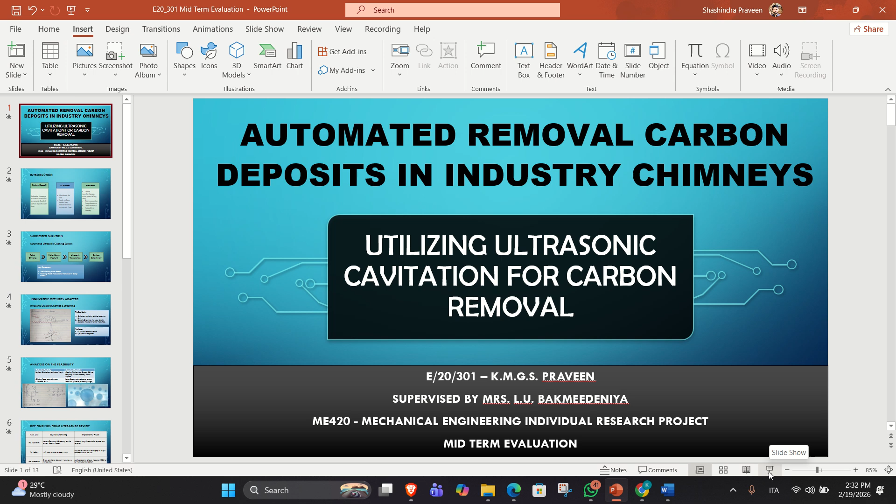I am Shashindra Praveen, and today I will be presenting the midterm evaluation for my ME420 individual research project. My research focuses on utilizing ultrasonic cavitation for carbon removal, especially designing a system to clean industrial chimneys. This project is advised by Mrs. L.U. Bakmeedeniya.

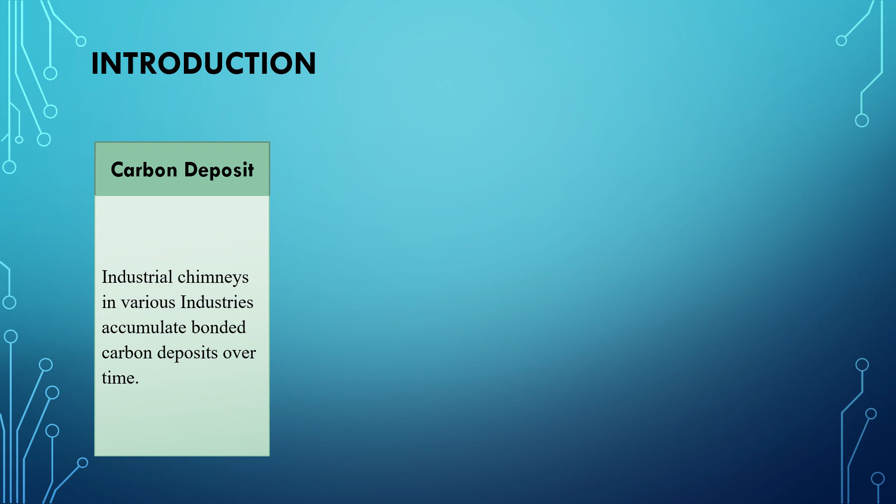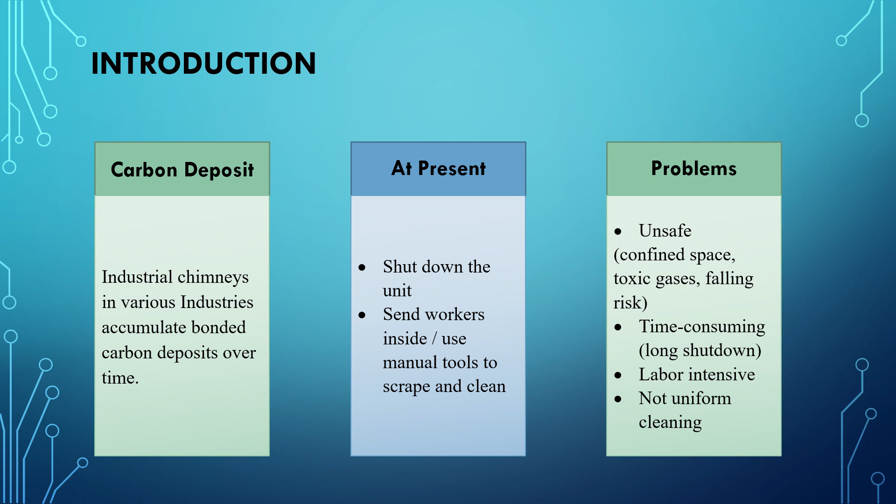Currently in industrial chimneys, the wall is bonded with carbon deposit over time. To clean them, operators have to completely shut down the unit and send workers inside with manual tools. As you can imagine, this creates many problems: it's fully unsafe due to confined space, toxic gases, and falling risk. Also, it involves a long time-consuming shutdown and is heavily labor intensive. And this is not a uniform cleaning because it is manual.

To solve this, I am proposing an automated ultrasonic cleaning system as shown in this slide. The concept relies on a wall-climbing robot chassis equipped with a special cleaning head containing a piezoelectric transducer and a water spray nozzle. The system applies a water medium, and the ultrasonic transduction removes the deposited carbon while the robot climbs.

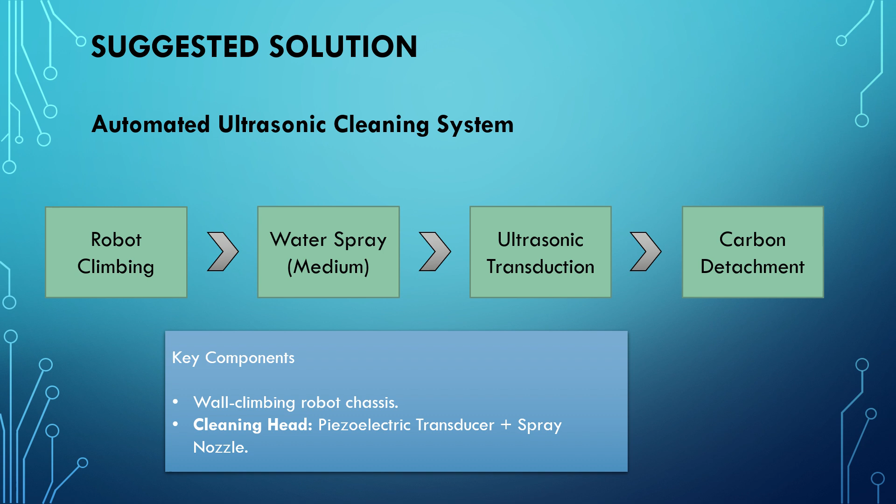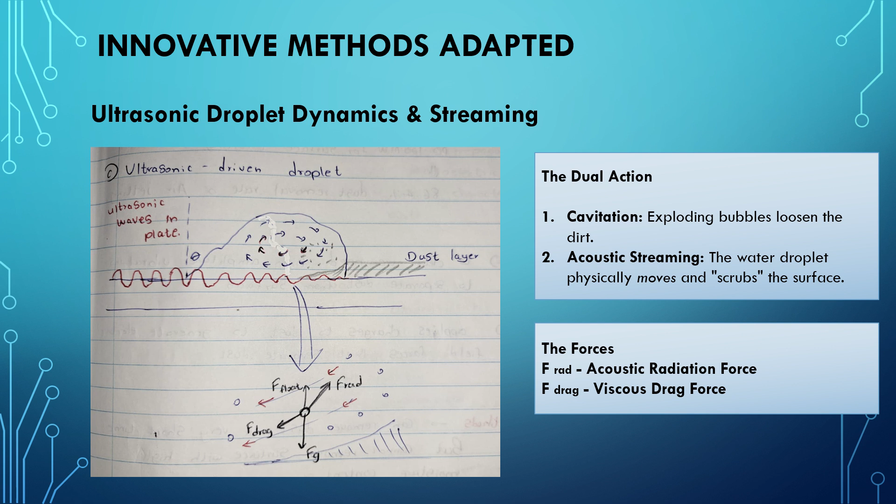So how does the actual cleaning work? As you can see in my sketch, the mechanism relies on ultrasonic-driven droplet dynamics. We are balancing acoustic radiation force and viscous drag force. This creates a dual action. First, cavitation occurs, where microscopic exploding bubbles physically loosen the dirt. Second, we get acoustic streaming, where the water droplet is physically moved to scrub the surface and clear away the loosened carbon.

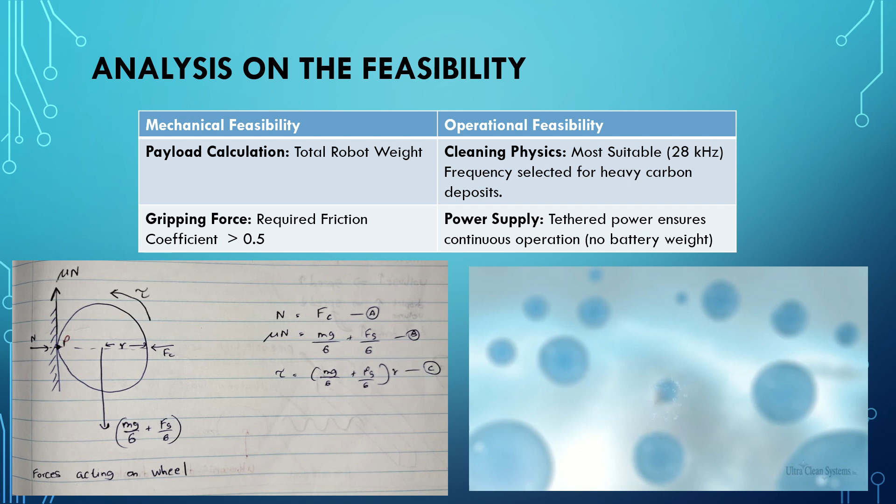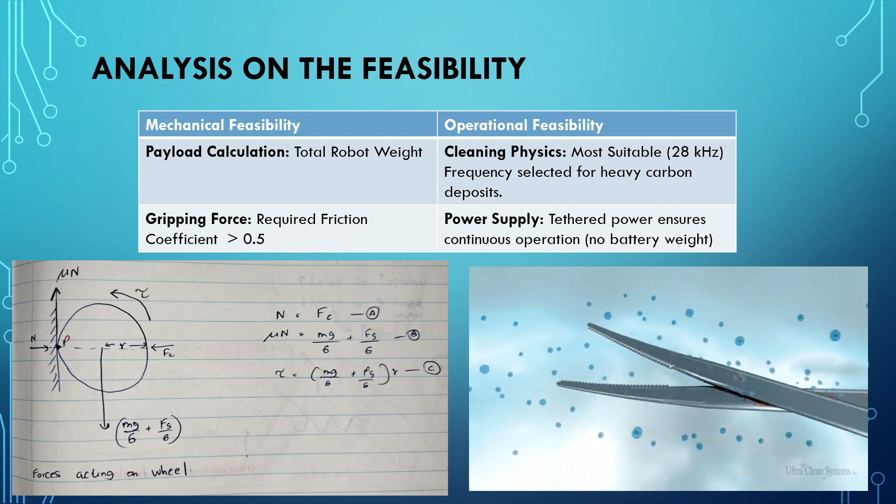Before building, I conducted a feasibility analysis: mechanical, looking at the free body diagram of the wheel forces. The gripping mechanism requires a friction coefficient greater than 0.5 to support the payload. Operationally, I need to keep the robot weight down. The system wants power for continuous operation, so I use a continuous power supply for this.

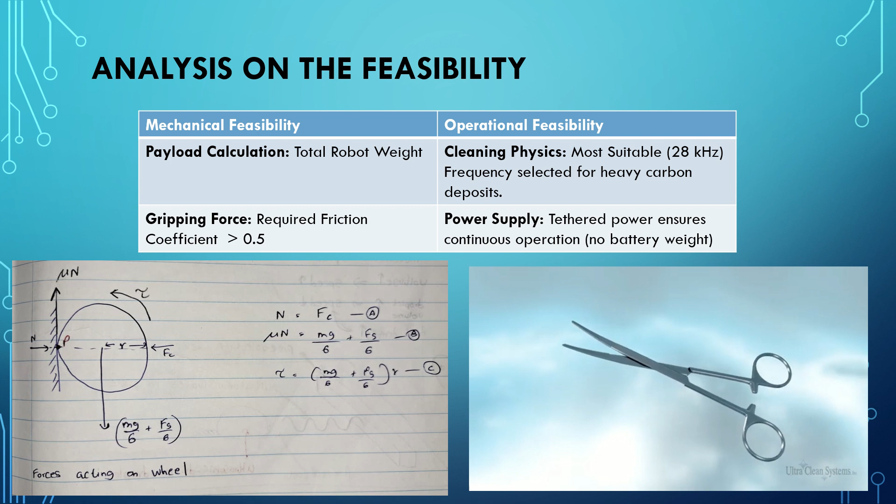For this cleaning physics, I select the 28 kHz frequency, which is more suitable for tackling heavy carbon deposit, but I have to analyze more about the frequency to find the optimal one for removing the carbon particles.

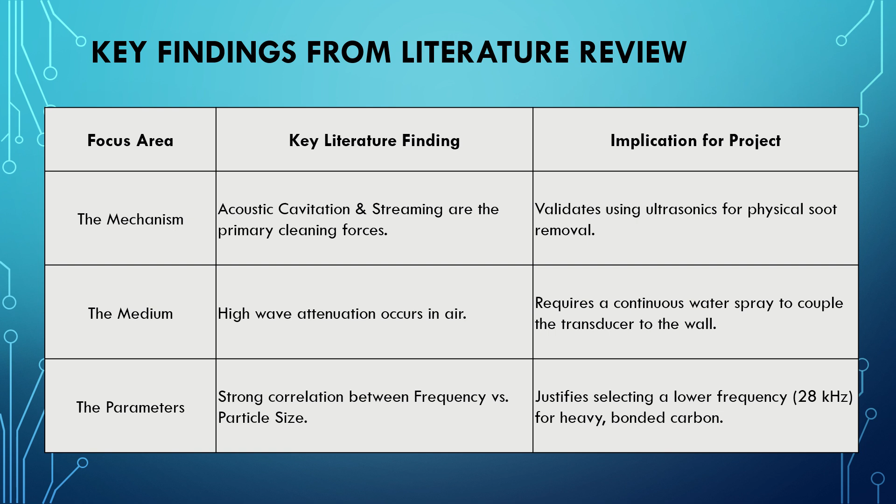During my literature review, I confirmed that acoustic cavitation and streaming act as the primary cleaning forces. However, because ultrasonic waves experience high attenuation in air, a liquid is absolutely necessary to transfer the energy to the wall. I also found that while high frequencies are good for fine polishing, heavy industrial soot requires lower frequencies, around 28 kHz, to generate the high energy shock waves needed for debonding.

That brings me to the research gaps I identified. The first gap is lack of data on optimal liquid film thickness; most existing data is not for vertical surfaces. In this case, there is a balance: if the water layer is too thin, cavitation simply fails, but if it is too thick, we are just adding unnecessary payload weight to the climbing robot.

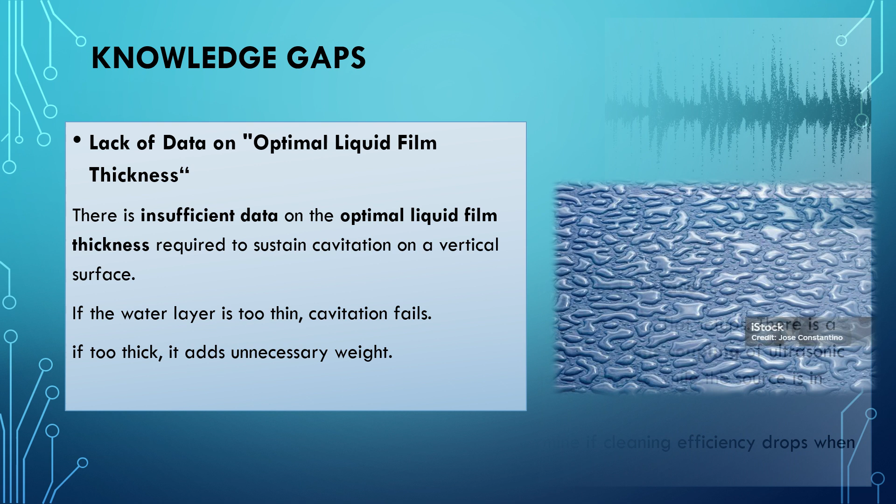The second gap is the unknown acoustic debonding threshold, especially for industrial carbon. The literature does not clearly define the minimum vibration energy needed to remove soot. We simply don't currently know the exact acoustic amplitude required to overcome the adhesion force between carbon particles and the wall.

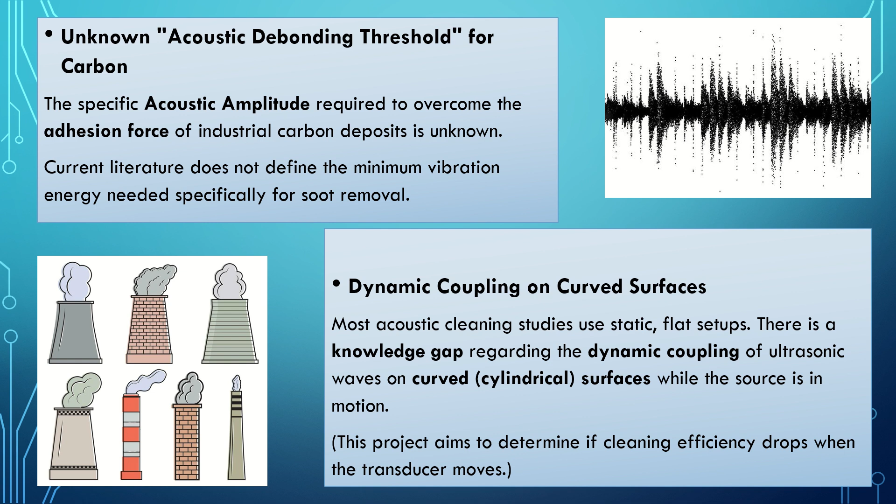The final gap is dynamic coupling on curved surfaces. Most ultrasonic cleaning studies are done on static and flat setups. My project will specifically determine the cleaning efficiency when the ultrasonic transducer moves on a cylindrical surface, not a flat surface.

To resolve these gaps, I have a three-part experimental strategy. To find the optimal liquid thickness, I will run a flow rate variation test, with water spray between 50 to 200 millilitres per minute on a vertical surface, to observe cavitation stability versus gravity runoff. To find the debonding threshold, I will compare the cleaning rate and calculate removal efficiency at various frequencies between 28 and 40 kilohertz.

Finally, to test dynamic coupling, I will operate a prototype field test on a curved surface and measure the area coverage rate versus the robot's climbing speed.

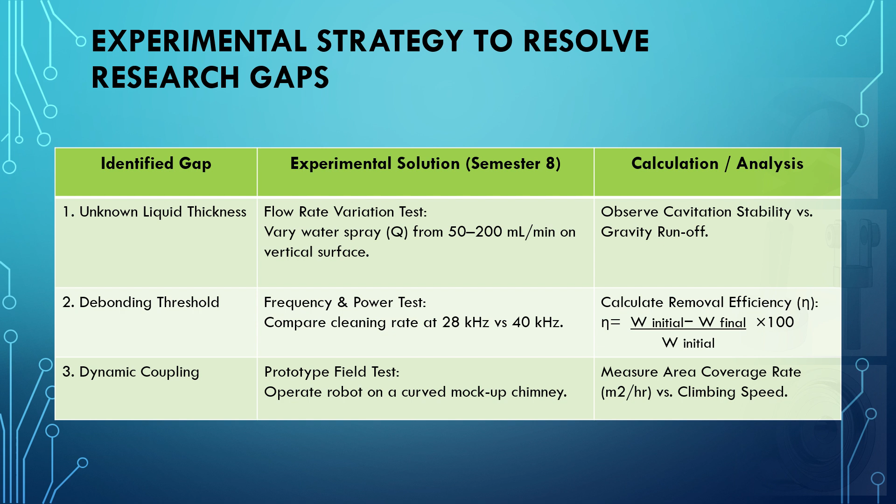To execute these tests, I've been developing the prototype in SolidWorks, since I can't run that experiment physically, using software like ANSYS. These are the parts I use to develop it.